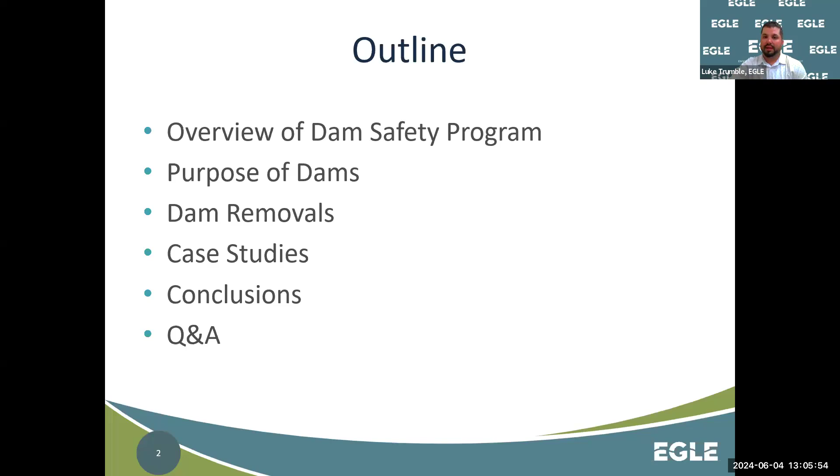For history, Michigan's Dam Safety Program was established in the late 1970s, I believe 1978 was the official date. It followed two major dam failures out west: the Buffalo Creek and the Teton Dam failures, which sparked a nationwide interest in dam safety. The federal government established a national dam safety program, and states started to follow suit. It was originally housed in DNR's engineering division, and we really didn't have much authority at that time. It was just to permit construction of new dams. We had very little regulatory oversight of existing dams or any safety standards.

That all changed at the end of 1989, when Public Act 300, the Dam Safety Act, was established, giving us authority over construction, alteration, and removal of dams, and setting forth safety requirements dams must meet to be in compliance. It also provided an avenue for compliance and enforcement if dams were found out of compliance. That was slightly modified in 1994 and wrapped into NREPA, the Natural Resources and Environmental Protection Act, so it's now known as Part 315 Dam Safety. In addition, we have Part 307, the inland lake levels statute, more commonly known as the legal lake level statute.

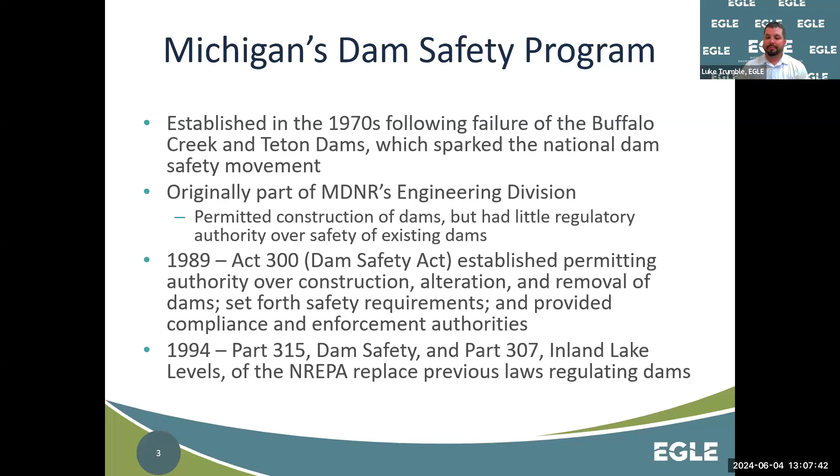So who we are in the Dam Safety Program: there are 7 of us including myself, and these are my 6 staff - I'll show you a coverage map. Allison Hartz, Thomas Horak, Mason Manuzak, Mike Size, Joy Stone, and Mitchell Thalen. Four of them cover regions of the state, and we have a grants administrator and centralized senior staff in Lansing.

This is the coverage map. Mike Size covers the UP and northern portion of the Lower Peninsula. Thomas Horak covers Southwest Michigan, including the Grand Rapids and Kalamazoo districts. Joy Stone covers the Lansing, Thumb, and Saginaw Bay area - the Bay City and Lansing District Offices. Allison Hartz covers the southeast portion of the state - the Jackson and Warren District Offices. Mitchell Thalen has statewide coverage, and also vital, though not shown on this map, is Mason Manuzak, whose primary function is grants administrator and coordinator for the Dam Risk Reduction Grant Program, which was implemented last year. So that's the staff.

What we needed to understand: what is a dam and what do we regulate? The Part 315 dam safety definition is basically an artificial barrier that is 6 feet high and impounds at least 5 acres of water. There are smaller dams that don't meet those size criteria that aren't regulated under dam safety, but are still dams - they pose less risk and create less of a barrier than those meeting the size criteria under Part 315.

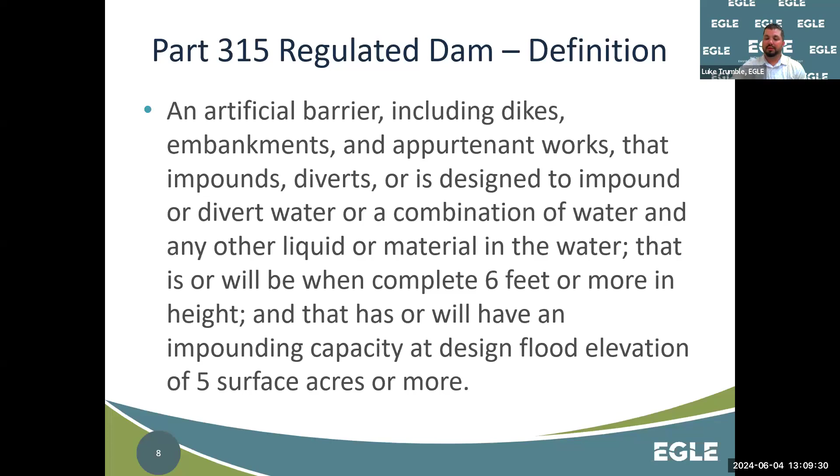And then as you go north, there's still a lot of dams. There's dams in every county, but the concentration spreads out as you get into the more rural areas.

Of those 2,600, approximately 825 are regulated under Part 315 - those are the ones that are 6 feet high and impound at least 5 acres. Another 235 or so are regulated under Part 307, the inland lake levels statute, legal lake level structures. And then an additional 92 federally regulated hydropower dams - those are not regulated under dam safety by the state, but are regulated by the Federal Energy Regulatory Commission as they produce hydropower.

Of those regulated dams, approximately 800 are privately owned and 350 are publicly owned. The remaining 1,400 plus or minus dams in the inventory are unregulated, meaning they do not meet the size criteria for Part 315 regulation, don't have a legal lake level associated with them, and are not regulated by FERC. So those are the smaller dams that don't meet the requirements of any of those statutes.

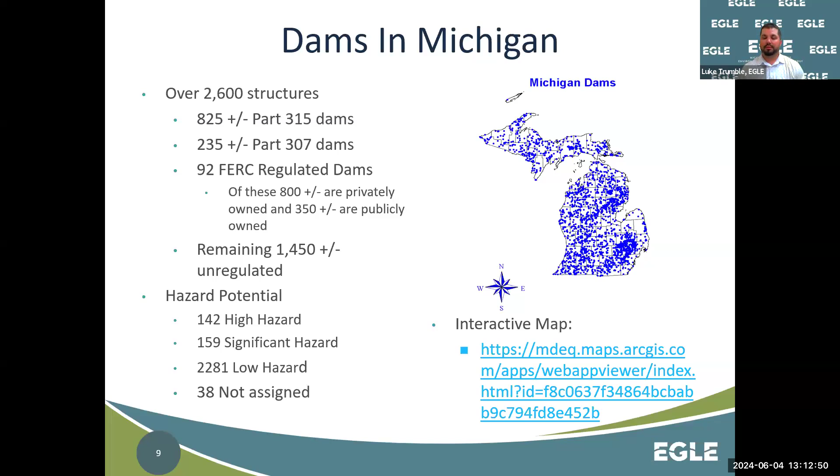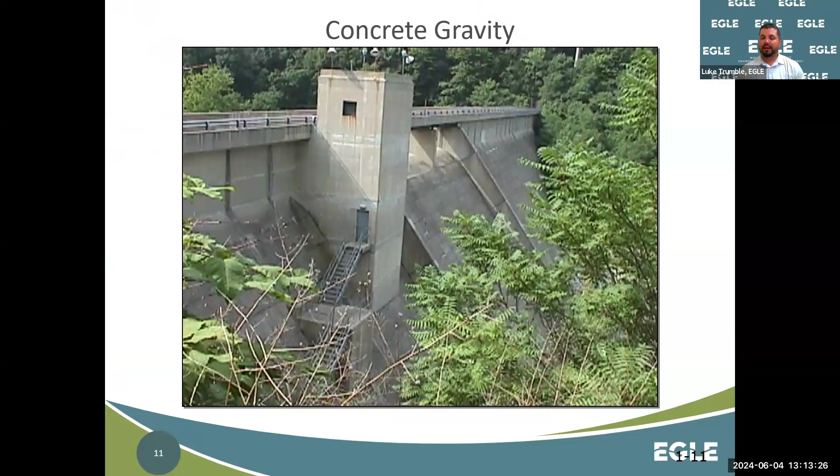Other than what comes to mind, this is a concrete gravity dam. It's basically where the concrete structure spans from bank to bank, and the mass of the concrete itself holds the dam in place and holds the water back. There is no earthen portion of the dam.

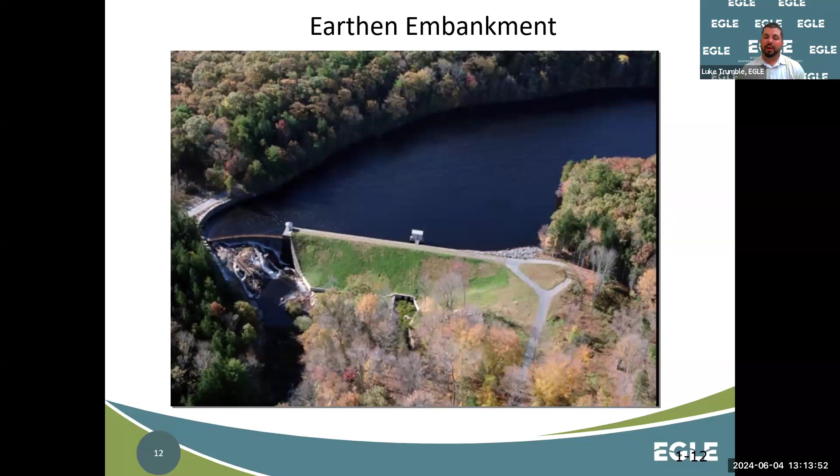More likely what you see in Michigan is something like this, where you have a large earthen embankment, and then you might have concrete or steel portions of the dam that convey water. This one has a primary outlet as the house-looking structure in the center of the photo, with the conduits through the dam with the outlets, and then an overflow spillway or emergency spillway at the end, shown on the left of the photo.

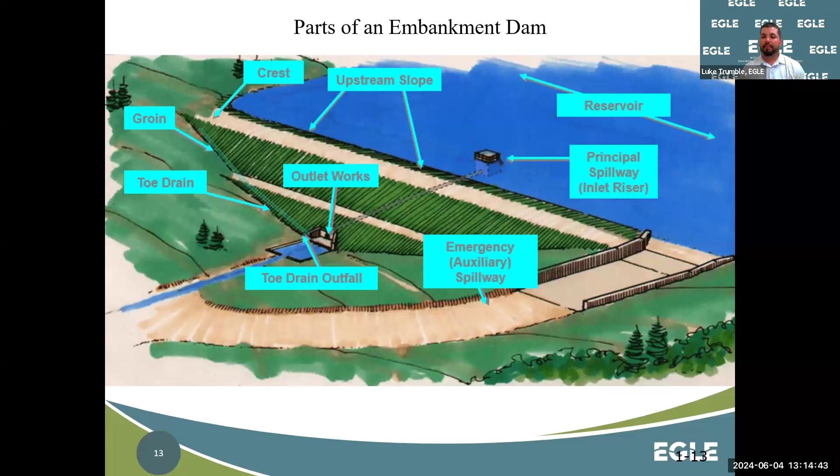A lot of times dams will have a clay core, an impervious core with seepage cutoff, which could be steel, sheet piling, could be clay, could be concrete, could be a bentonite slurry.

Oftentimes they'll have a downstream filter and drain system, which kind of collects the seepage that does make it through the impervious core and discharges that in a safe manner, rather than having it express out on the slopes of the dam and create slope stability issues.

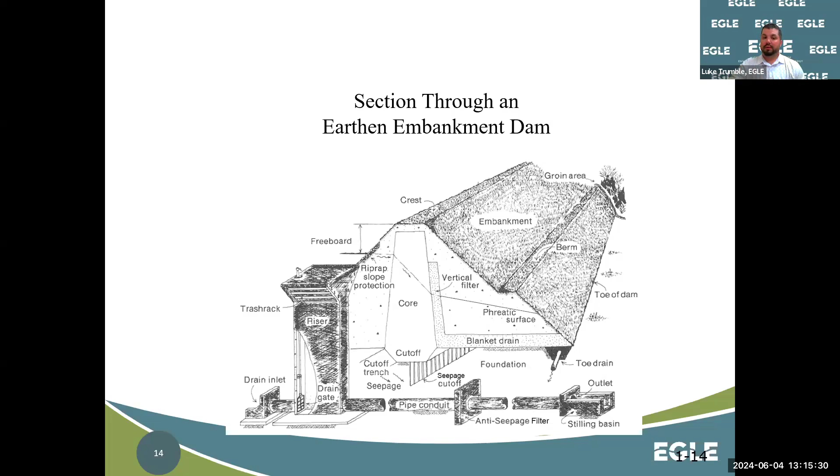So that's what a dam is. So what do we do? How do we regulate dams?

Like I mentioned earlier, we administer Part 307, which is the inland lake level statute. And that basically sets forth a process for folks to be able to establish a legal lake level on their lake that must be maintained.

In doing so, they typically set up a special assessment district so that taxes from that district can fund the long-term ongoing operation and maintenance costs, repair and replacement costs of the dam that maintains that lake level.

Under the statute, the counties typically take over authority over the dam, and they are required to have an engineer inspect their dams every 3 years.

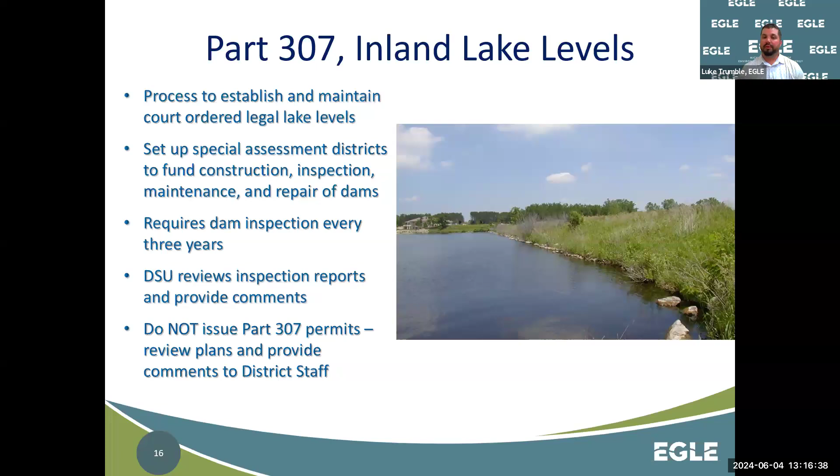We would review those inspection reports and provide comments on how the dam is being maintained, additional studies, repairs that are needed. We do not issue permits under 307, but rather we do a plan and specification review and provide authorization for construction. That typically happens alongside permit reviews under other statutes that EGLE does administer.

Part 315 is the other law that we administer. It's the dam safety statute. As I mentioned, it used to be known as the Dam Safety Act, PA 300, Public Act 300.

But the statute now, Part 315, mandates inspection of regulated dams, and that happens every 3, 4, or 5 years, currently based on the hazard potential that we talked about earlier. High hazard potential dams are inspected every 3 years, significant every 4, low hazard potential structures every 5.

It gives us the authority to enforce the statute and issue permits for dam related activities. It also allows us to inspect municipally owned dams free of charge if the municipality that owns the dam requests us to do so.

For those folks who have their own consultant do the inspection of dams, we review those and provide comment. High and significant hazard potential dams are required to complete and maintain an emergency action plan, which basically outlines the procedures and responses if a dam failure or something that threatens the dam were to occur. And then we can take enforcement actions when the dams are out of compliance.

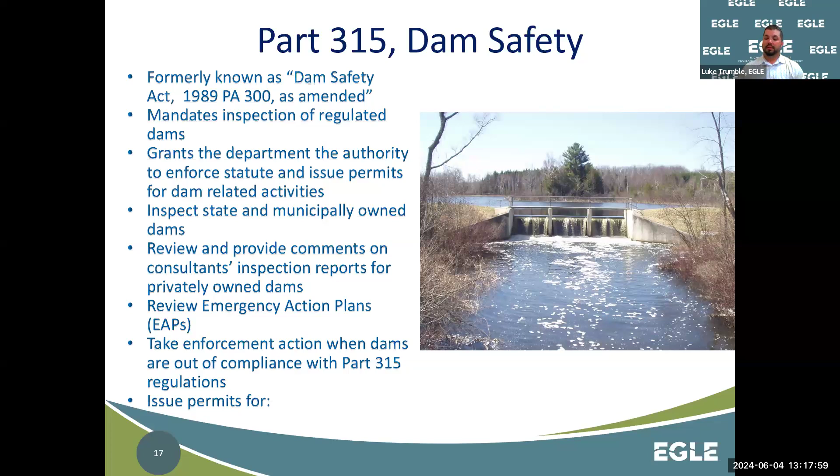So some of the things that we issue permits for - actually this is out of line, but this is kind of where we fit into the grand scheme of the Water Resources Division assumed 404 regulatory assumption.

So we have lakes and streams and wetlands, and then we have dams, and they're all kind of interconnected. Dams are kind of at the outlet of the lake.

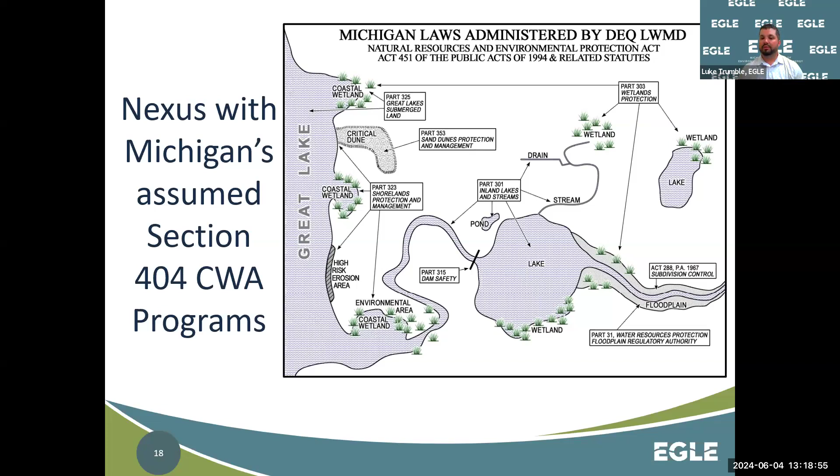So a lot of the permitting considerations that we have also dovetail right in with floodplains, wetlands, inland lakes and streams, and some of those areas that would include permitted activity under Water Resources Division. So it's very, very infrequent that we would issue a permit at a dam that also didn't require review under those other statutes affecting wetlands, streams, floodplains, and things like that.

So some of the things that we do issue permits for: construction of a new dam, alteration or repair of an existing dam, enlargement of a dam or an embankment or impoundment, and removals of dams. Abandonment of a dam is something that's very infrequent, but if it were to occur we would have to issue a permit for that, and then reconstruction of a failed dam.

And we're getting less and less permit applications for new dam construction. I've got a slide later on, we'll talk a little bit more about that, but it's very difficult to permit new construction of new dams when they're on a stream, just based on the environmental impacts and the potential flooding impacts and things like that.

So we've only had, I think in my tenure, I've permitted one new dam in 14 years on a stream, a few more that were off stream, like water resource or water supply reservoirs and things like that. But very, very few applications come in for new dam construction, and it's been that way for quite a while. I'll show a slide later.

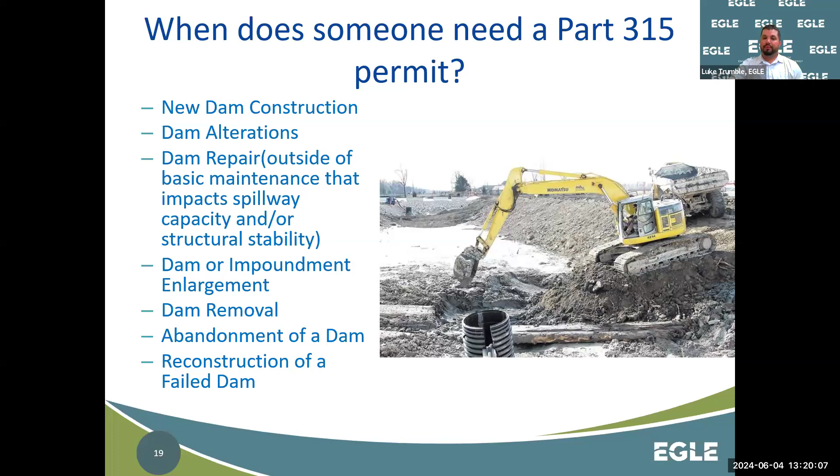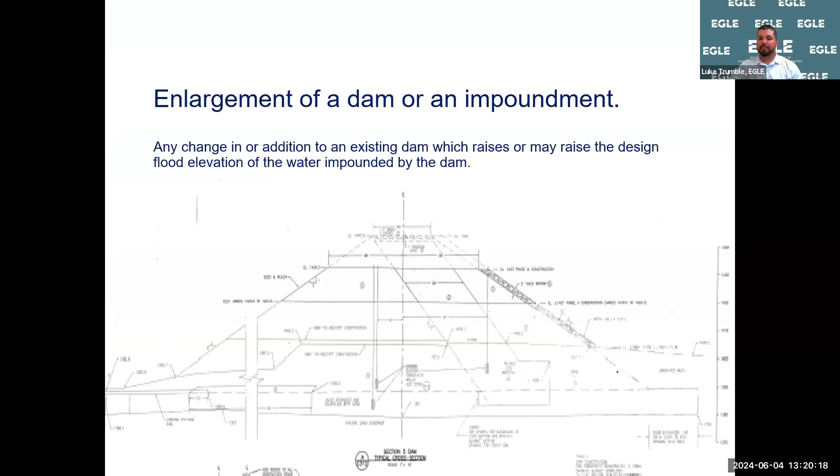So these are just some photos. Construction of a new dam obviously would require a permit under Part 315. Enlargement - it's hard to see from here, but these plans show a raising of the embankment and of the impoundment near the top in those dotted lines.

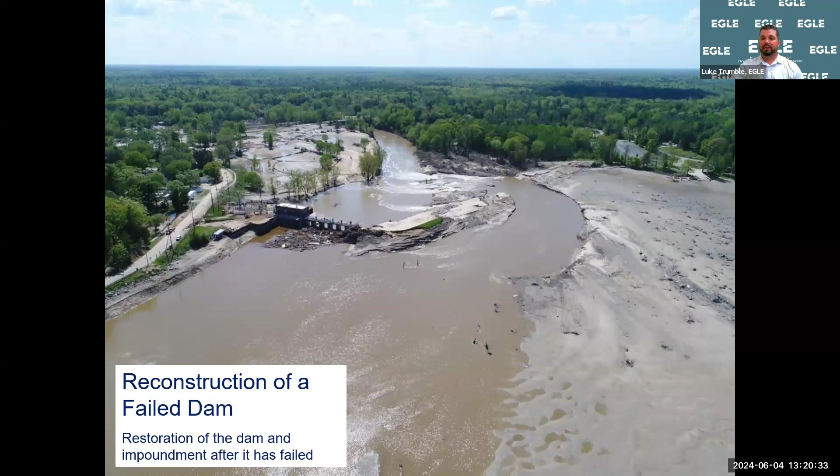Reconstruction of a failed dam. After a dam fails and folks wish to reconstruct it and restore the impoundment, that requires a permit under dam safety and several other statutes as well. And removal of a dam, when somebody wants to physically remove the dam and the impoundment and restore a stream channel, that also requires a permit to do so.

So taking a step back, we can look at why do we have dams in the first place? What are some of the historic and current uses of dams, and why did we historically construct dams?

Before hydroelectric power, a lot of dams provided mechanical power for grist mills, sawmills, things like that, to cut lumber, grind flour, float logs. That was one of the first purposes of dams in Michigan, to modify the stream to use the power of the water to perform some type of task that folks need. There are still a few mechanical power dams around, but those are less and less these days.

There's hydropower. A lot of dams were constructed as hydropower, or mechanical power dams were converted to hydroelectric power after they were built. There are 92 regulated hydropower dams, and a couple more hydropower dams in the state that are exempt from federal regulation and are regulated by the state. So around 100 total operating hydropower dams in the state that generate hydroelectricity.

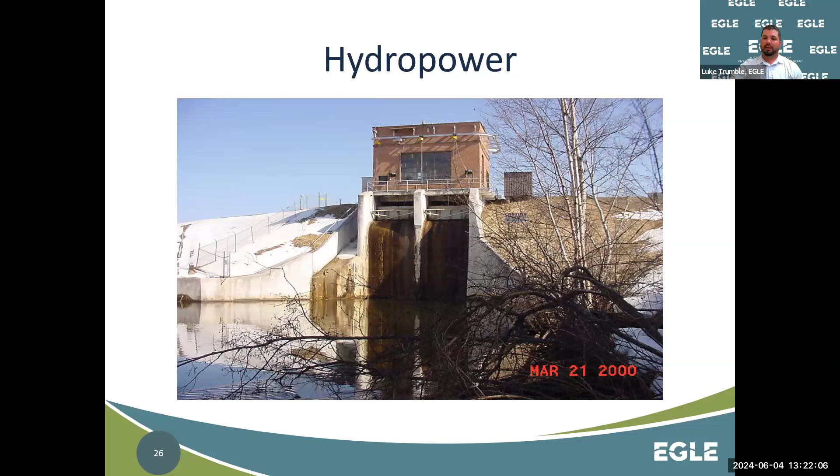Navigation, obviously, locks and dams, and augmenting of streams and lakes to allow for better navigation has been a historic and current use of dams.

Lake level control and recreation. I would say this is probably the most prevalent now, just augmenting a lake level or maintaining a lake level for the purpose of maintaining a recreational impoundment, where folks live and play and boat and fish in and around the water. So I think that's probably the primary purpose of dams in the state of Michigan now.

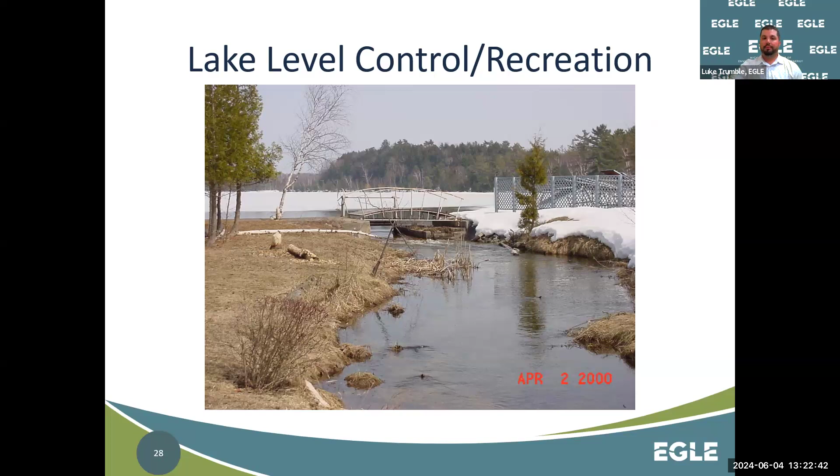Water supply, fire suppression. I don't think I included a slide.

Flood control. There's actually not very many dams in the state that are designed to provide flood control. We have 13 federally designed for the purpose of flood control.

Some other smaller dams and detention basin dams will provide flood control up to a certain flood. But most of the dams that you see that maintain a recreational lake, because the pond is full most of the time, provide very little flood control benefit during a large flood. There might be some benefit during smaller floods, but there's just no capacity to store and slowly meter out water over time if the pond is already full. So very few dams were designed for flood control in the state of Michigan, or are operating for flood control when you look at the whole.

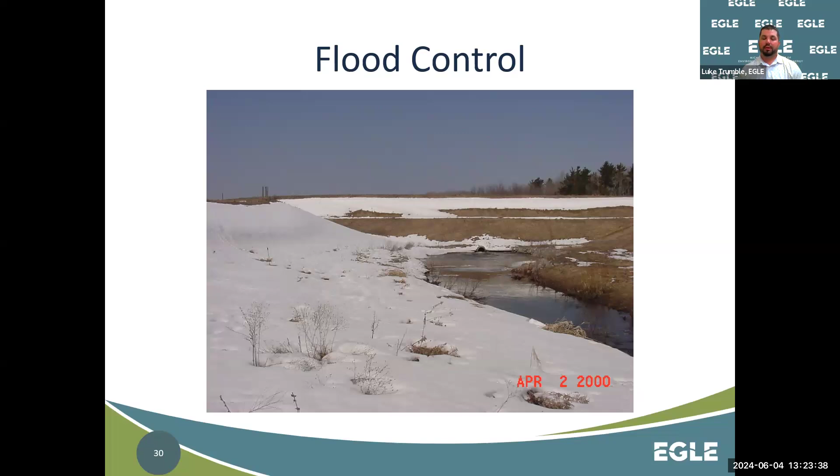And one that I didn't mention on here, but probably is pertinent to this group, is we also have several smaller dams that provide wildlife floodings, wetland mitigation sites, or just provide some type of wetland benefit from creating a shallower, less developed impoundment.

So we have all these dams. There's 2,600 in the inventory. There's probably hundreds more that we are finding every year, or that exist that are either too small to show up on a map, or remotely located. They're not in the public eye, so we don't know about them.

So why do we remove dams? The number one reason is safety. The dam is getting old, it's not been maintained, and dam maintenance is very expensive. So we're worried that there's a safety concern that the dam is going to fail if something isn't done. And often the most economically viable path forward is to remove the dam. We'll talk about benefits here in a couple of slides as well.

Along with the safety comes ownership responsibilities and liabilities. If the dam were to fail, a release of impounded water and sediment were to occur, there's a certain amount of responsibility and liability that lies with the dam owners that they might not want to maintain anymore. So as dams get older, the increased cost of maintenance and repair can be a deciding factor.

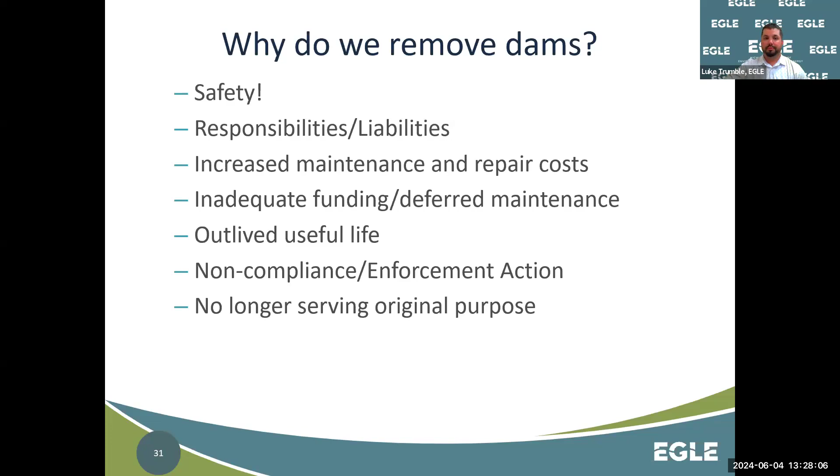This mirrors the national trend as well. Around that time, there were a lot of public works projects and industrial expansion, and dams were the flavor of the day. We built almost 500 dams in the state of Michigan in the 1960s. You can see it sharply drop off in the 80s and 90s, and though I don't have an updated figure, it continues to go down from there, to previous levels of less than 5, maybe 1 a year now in the early 2000s, 2010s, and 2020s.

So as you can see, from the peak in the 60s and maybe 70s, that puts the dams right in that zone of getting towards the end of, or surpassing, their useful design life. So for all the dams that are 50 years old or older, unless there's been routine maintenance that extends the life of the dam, we're probably talking about very significant investment to maintain that dam in a safe condition, which would be full rehabilitation or replacement of the structures.

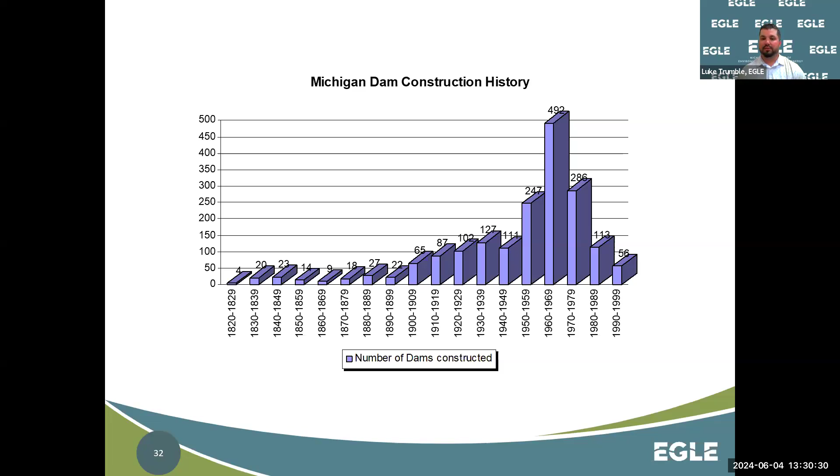So I think that's why, if you had a figure that said dam removal history in Michigan, I bet it would mirror this, where it was probably very low and then it's probably trending up. I don't know if we'll ever see 500 dam removals in a year, but we've seen a continued increase from the 90s, early 2000s, and now. I think we average between 5 and 6 dam removals per year, and I think we're going to continue to see that trend increase.

So here's some of the benefits, social and economic benefits of dam removal.

As we kind of talked about earlier, it eliminates the hazard associated with dam failure. So if you remove a dam, it no longer holds back water and sediment that could be released in the event of a failure that could cause downstream and upstream impacts that we'd be concerned about.

You eliminate your long-term operation and maintenance costs. Typically when a dam is removed and the stream channel is restored, it should be stable and should not require a lot of ongoing maintenance. So the cost to maintain should go way down.

It reduces upstream flooding in a lot of cases, where if you're holding the water level artificially high, as flood flows increase, areas outside of the impoundment could flood. If you take the dam out, that water level drops significantly, and typically those areas no longer flood during the same storm event. And then you restore the natural flood storage and attenuation that's provided in adjacent wetlands and floodplains that were underwater while the dam was in place.

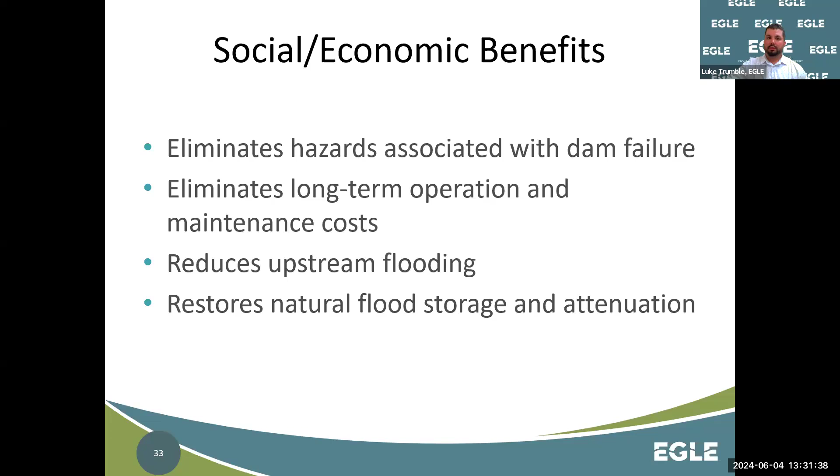Ecosystem benefits: you improve the movement of biota, aquatic and terrestrial, upstream and down. Improve riverine habitat for spawning, foraging, and other things. Restore the natural flow regime and sediment transport, which helps improve habitat quality.

Water quality: we eliminate the thermal pollution that happens as water warms in impoundments. We get increased dissolved oxygen and decreased biological oxygen demand. So we improve nutrient cycling and movement, and restore the natural channel morphology—the ability for the channel to adjust to different flow patterns and move sediment through the system, reaching a dynamic equilibrium where we don't have impounded sediment or erosion occurring as much in the stream system.

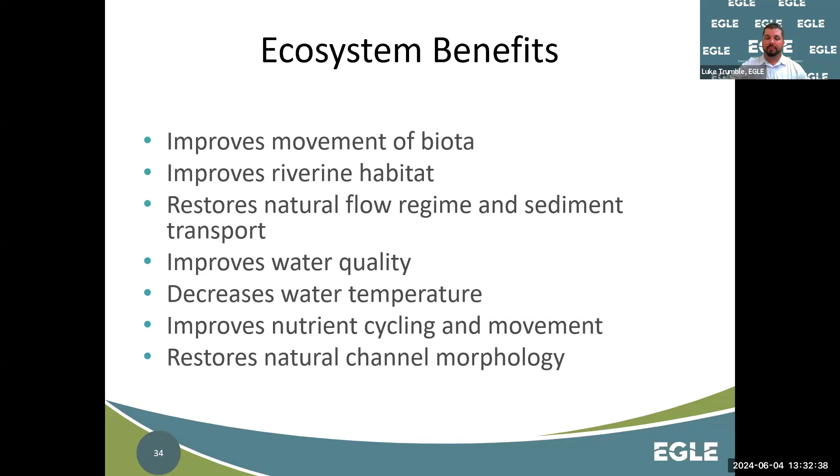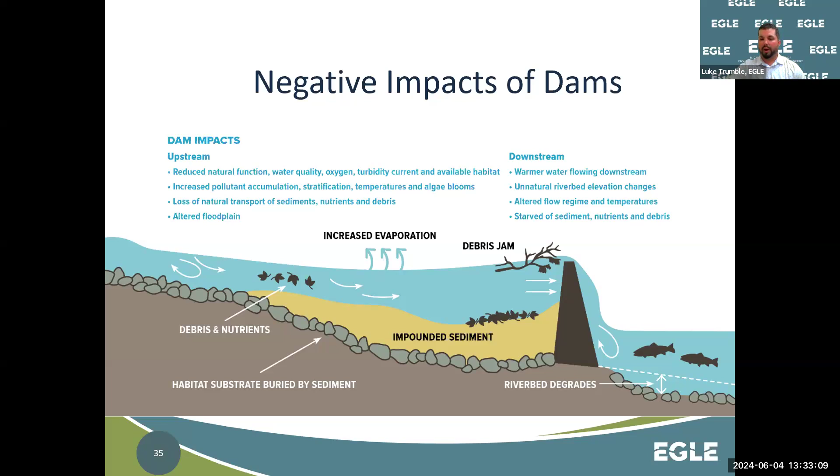Here are more benefits: increased spawning habitat, passage, cooler temperatures, natural flow regimes—things like that I already talked about.

So I'm going to switch gears a little bit and go to more of the permitting of dam removal projects. I just wanted to be upfront that dam removal projects are complicated. They have a lot of moving parts, a lot of statutes that we administer here in Water Resources Division, and some other statutes that are outside of our purview but still housed within EGLE. I drew this diagram.

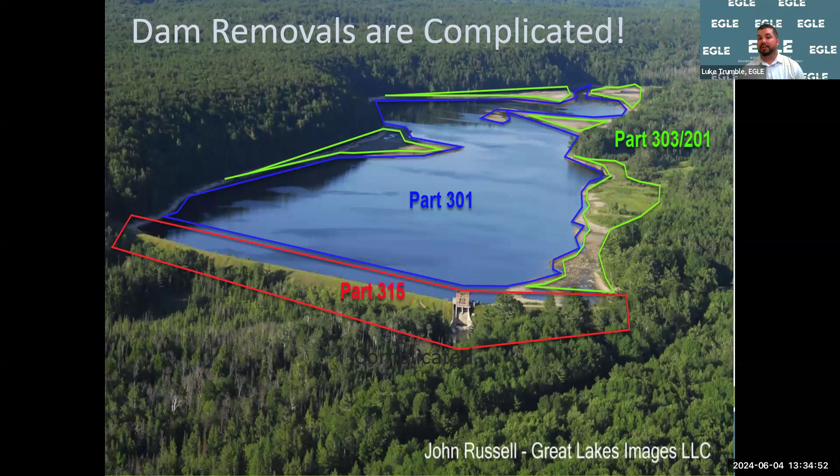Then the green areas are typically regulated wetlands under Part 303, but I also put Part 201, which is administered by Remediation and Redevelopment Division and has to do with soil cleanup criteria—direct human contact on soils. In this partially drawn-down scenario where the impoundment was lowered several feet, it exposed areas that used to be sediment underwater, now soils subject to direct human contact, so there are different cleanup criteria for those soils.

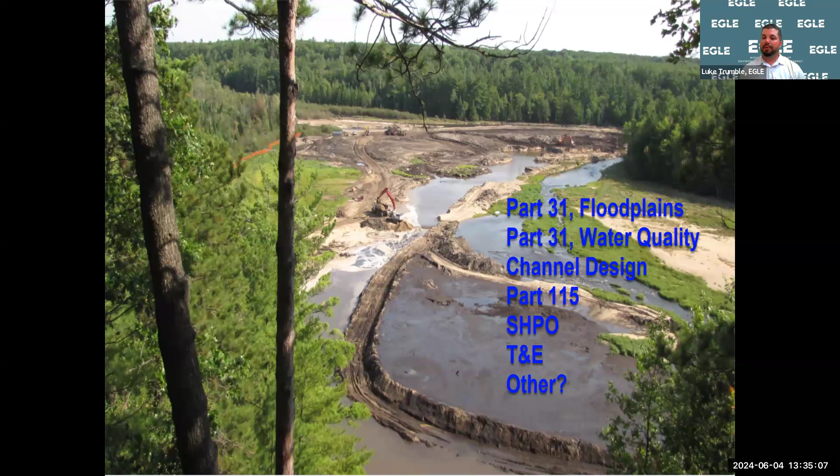This is another picture from the same project during the removal. We've got Part 31 floodplain—we'll have to review the hydraulics of the floodplain, conveyance of water, placement of fill, and excavation in the floodplain and floodway. There's also Part 31 water quality concerns.

Obviously there's a lot of sediment mobility and turbidity that occurs when you dewater a channel and start to move sediment again. There's channel design—we want to do an in-depth review of what that stream channel and floodplains and the stability and morphology of the stream will look like.

Part 115 relates to solid waste under our Materials Management Division, which administers Part 115 and Part 111, related to solid waste and hazardous waste, respectively.

Anytime you start dredging sediment, if it's not designated as inert, it becomes a regulated waste, and you have to handle it, dispose of it, or store it in accordance with that statute as well.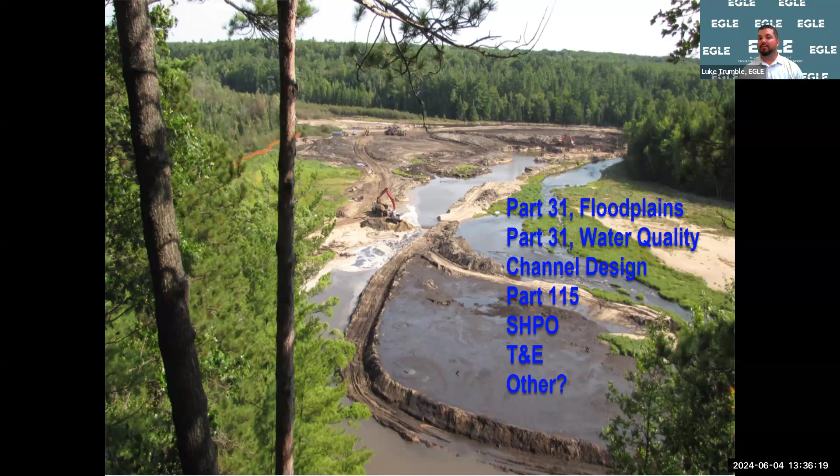SHPO, the State Historic Preservation Office, is also relevant. Oftentimes areas around dams or in former impoundment areas have some type of cultural significance, with potential areas where artifacts have been found. The dam structure itself might have some historical relevance, so there's definitely a SHPO component.

T&E, threatened and endangered animal or plant species, often occur in the wetlands and forested areas that surround the impoundment, or might reform in areas of the impoundment that are exposed. There are several other concerns that might arise on a case-by-case basis.

So that's just kind of an intro. These things can get very complicated. A lot of stakeholders, a lot of coordination that needs to occur, a lot of considerations that need to be made, and requirements that need to be met at multiple levels - state, local, and federal.

So what do we review on our end when we get a permit application for a dam removal? We talked a lot about Part 315 dam safety. The key components we look at there are the safety, dewatering, and physical removal of the dam. Once the dam barrier is eliminated and it's no longer maintaining head, the dam safety component is more or less satisfied - that's strictly the engineering behind safe removal and dewatering of the impoundment.

But in doing so, there's alteration of water levels, grading below the ordinary high water mark, and stream restoration and channel design that all need to be reviewed under Part 301 inland lakes and streams, to ensure impairment of the stream and habitat and all the animals that use the stream is acceptable, so that an impairment doesn't occur.

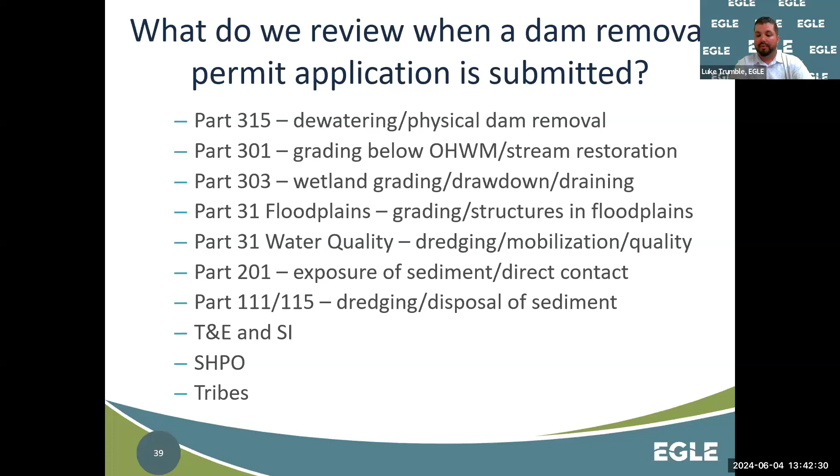On the threatened and endangered species and species of special interest: SHPO, as we mentioned earlier, covers cultural significance, cultural relevance, artifacts, or structures that have historic relevance as well. Tribes are often very interested in dam removal projects and want to ensure that those same areas of cultural significance are protected, and that the dam removal will provide benefit to those important areas.

So a little bit more information about what's required. We're getting into the name of the presentation: facilitating dam removal projects, facilitating permitting of dam removal projects. We're going to get a little bit into the weeds about what is required in a permit application for dam removal. It involves multiple statutes and multiple pieces of information and documentation that need to be provided, commensurate with the complexity of the project. Smaller dams where some of these things are not as huge of a concern, we can scale back a little bit. But the larger dams in some of the case studies with large impoundments and bigger streams often require a lot of information to be submitted with the permit application.

Strictly speaking about Part 315 dam safety, the joint permit application form needs to be filled out with the relevant dam and spillway section completed. That will have blanks that need to be filled in about the dam—the size of the dam, the quantity of cut and fill along the dam embankment, lowering of the water, how far the water would be lowered, and stuff like that.

We need a site plan, specification, and basis of design report typically to review. We need to understand how the dam will be removed and how water will pass through. That's more in the dewatering plan, but also care of water during construction—both stormwater and conveyance of flow in the stream. We need to see the basis of design, what calculations, modeling, and analyses were run to come up with the design to ensure that it's safe, that we don't have failures pre, during, or post construction that would result in an uncontrolled release of sediment or water.

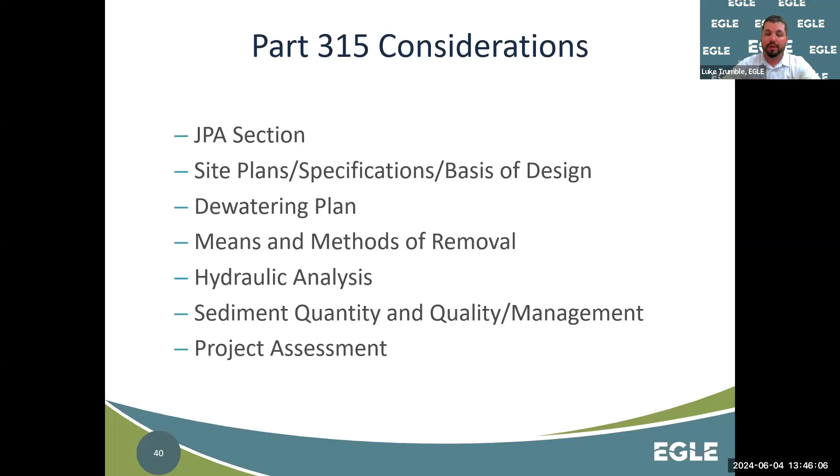Then there's a project assessment, defined in statute and in rule under Part 315 administrative rules. A project assessment document needs to have an analysis of a laundry list of things: wetlands, streams, fisheries, wildlife, threatened and endangered species, water quality, stream flows, sediment transport, turbidity, water chemistry, water temperature, and riparian rights. So in the project assessment document, we need to understand all the positive and negative impacts on each one of these categories related to the dam removal, and mitigative strategies when required.

Some of these will be a clear improvement, right? But some of these—a dam removal could have some impact on wetlands or things like that—might require mitigation if the project is carried out in a certain way. So we just need to have an assessment of the positive and negative impacts and mitigative strategies where required.

So jumping to Part 301 inland lakes and streams, same thing, the joint permit application has sections for inland lakes and streams, cut and fill below the ordinary high water mark, structures to be erected on bottomlands, channel design, things like that.

Site plan specification basis of design is going to be a constant theme for a lot of these, along with the feasible and prudent alternatives analysis.

This is a big one, right? When you're looking at the different ways to remove a dam and restore the channel, we specifically need to see that impacts to aquatic resources are avoided, minimized, and then mitigated, in that order. So looking at different sizes, configurations, locations for fills or spoils placement, and other things that would generate less impact while still achieving the project purpose. We're required by law to ensure that designers have considered that, choosing an alternative that avoids and minimizes impacts first, and then mitigates for any unavoidable impacts.

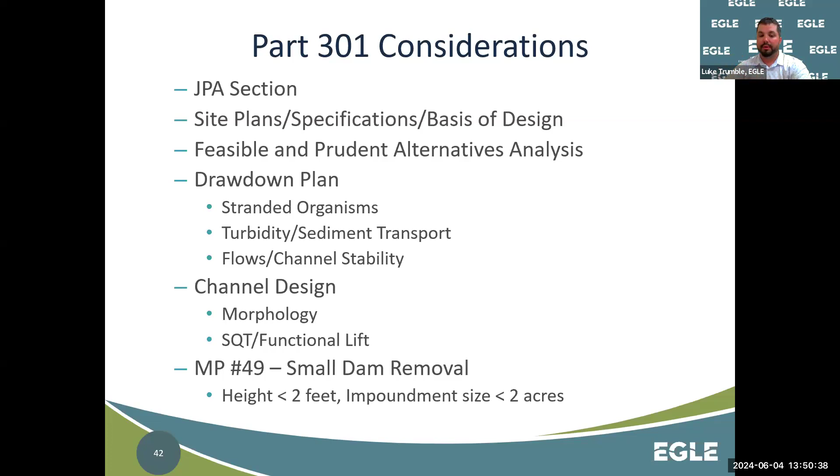And then just as a last note on Part 301, there is a minor project category, category number 49, for small dam removal. That's for dams that are 2 feet or less in height and impound less than 2 acres of water. For those, the requirements for permit application design are quite a bit less than something regulated under 315, or a larger dam with more head that impounds a lot more water and sediment. So there is an MP for this. If you have a dam you'd like to remove that's about 2 feet high and impounds a small area, talk with your district staff at EGLE about the possibility of permitting it as a minor project.

Part 303 is the wetland statute. Same thing here—I'll go through it quickly. Joint permit application sections, plans and specifications basis of design, feasible and prudent alternatives. This is more related to your grading and placement of fill. Have you avoided impacts to existing wetlands? Have you avoided impacts to areas that will reform as wetlands, to the extent possible? And have you reduced that footprint to the extent possible, then provided mitigation where needed?

So something we have a lot of conversation about with wetland professionals and consultants is what's needed for wetland delineation and analysis for dam removal. Typically we have to look at existing wetlands in the impounded condition, and then we need analysis of the post-drawdown and removal condition—what areas will remain as wetland, what areas will transition to upland, and what areas will reform as wetland that were previously underwater and not submergent wetland.

And then we have to try to avoid cut and fill in all the areas that would reform or persist as wetlands, or be prepared to mitigate for those fills. This is sometimes difficult because we can't account for all the areas where groundwater hydrology will remain at a higher elevation, like seeps on slopes that might maintain a wetland post-drawdown.

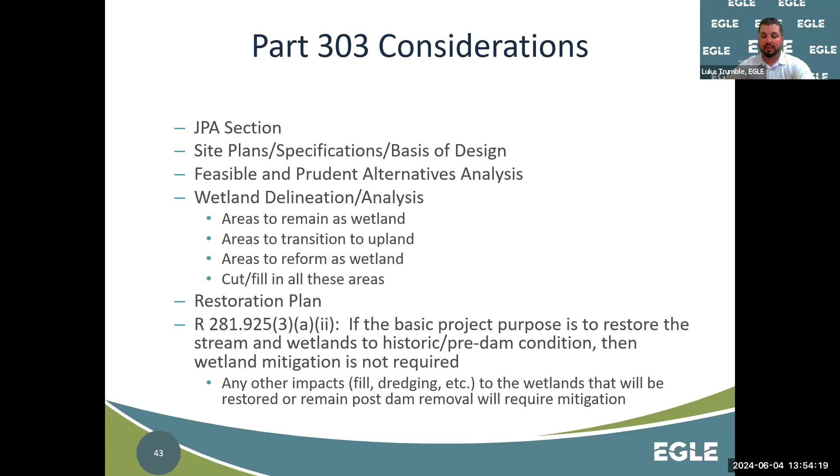Part 31, floodplain considerations. Obviously the joint permit application and plan specs, we need to understand the cut and fill in the floodway structures and the floodplain and floodway. I see there's a typo there, so we'll have to correct that.

Hydraulic model and report - if you look at the Part 31 hydraulic report guidelines, sometimes dam removals require a hydraulic model, sometimes they don't. It's typically dependent on what type - if you're going to put in-stream structures in, J-hooks, riffles, cross vanes, or any other type of in-stream grade control structure that might impact localized flooding, and if it's not clear cut that this removal will produce a reduction in flood elevations.

Through that hydraulic model report or otherwise, there has to be an analysis of harmful interference, which basically means any increase in flooding or velocities on structures that are insurable - people's properties, garages, houses, things like that - that would have increased flooding or flood velocities could be a harmful interference. So we need to understand that the project won't cause that in order for it to be permittable under Part 31.

I put in here as a note, a LOMR, a letter of map revision. Typically, if the community in which a dam exists is participating in the FEMA National Flood Insurance Program, it's the responsibility of the community to provide FEMA with the information and changes in hydraulic conditions, the modeling and maps for what the revised floodplain will be, so they can incorporate that into a letter of map revision and change those elevations, which regulate who's in and out of the floodplain and needs flood insurance.

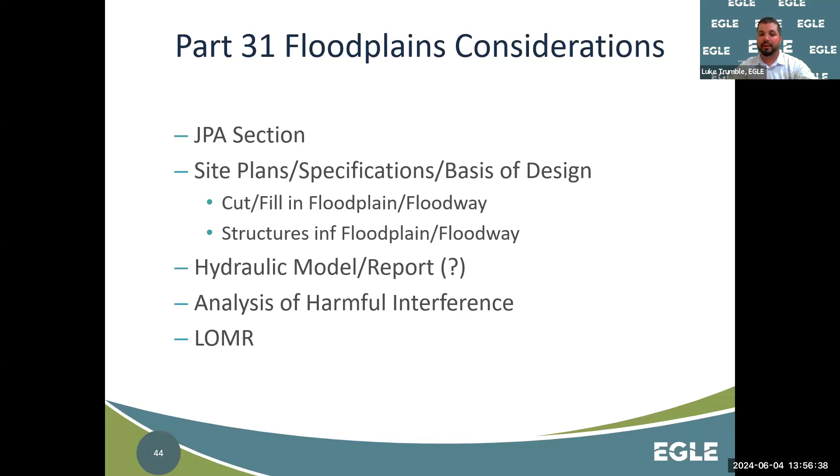It generally comes from the project, right? So the designers on the project will supply the information to the community to submit the application, so that they can make those changes and make sure that the folks that are in the floodplain post-project, or out of the floodplain post-project, are accounted for.

Water quality concerns, same stuff. What we really hone in on here is the volume of sediment available in the impoundment to mobilize. And then we'll have to do sampling and chemical analysis of those sediments, typically in accordance with WRD Procedure 48, which is a procedure for dredge sediments.

That's if it's a relatively small volume of sediment. If we have some of these larger impoundments that have hundreds of thousands of cubic yards of sediment that could be mobilized, typically we have to do more of a remedial investigation type approach, where it's a lot more sampling and analysis of the sediment quantity and quality outside of what was contemplated in Procedure 48, which was more for small dredge projects.

But we apply basically the same criteria on sample locations, size, depths, and numbers of testing analytes to characterize the chemical properties of the sediment in the impoundment that could be dredged, mobilized, or exposed by the project. Typically that involves cores to project depth, plus six inches, because we want to know what the material under the project depth would be that would be exposed to the water currently under sediment.

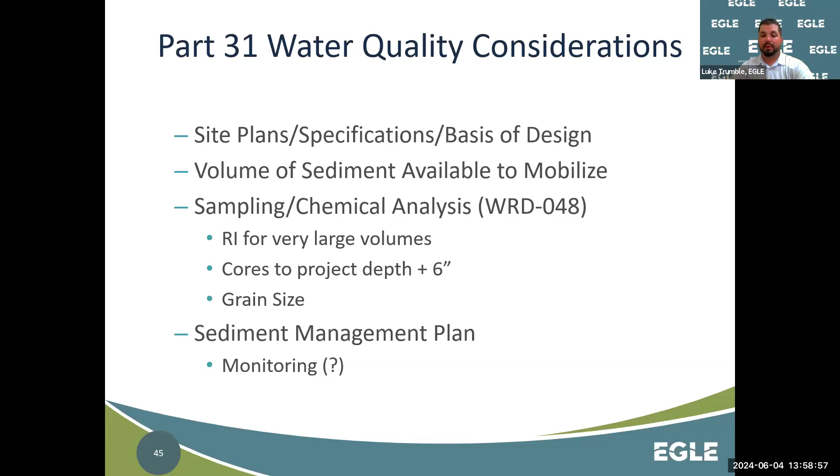Part 201, which is the soil cleanup criteria, a lot of the same things apply. What they would need to see here are maps of areas currently underwater that would be exposed for drawdown. And then the same criteria applies if dredged sediment is proposed for on-site disposal, locations of that, from where it's being dredged, and where it's being placed.

And then typically there's some sampling and chemical analysis. They typically utilize a different sampling approach where they're doing more of a gridded approach, only going down a certain depth to get the average contamination of that top layer of soil. And that's inconsistent with what we talked about earlier with the to-project-depth cores, so there might be some inconsistency there that might require follow-up sampling after drawdown.

But anyway, basically we're trying to determine whether or not the soils that will be exposed, that people will be subject to direct human contact with, post-drawdown and removal or placed on adjacent uplands, will create a facility under Part 201 and require something like due care, which depends on land use and the criteria for the amount of exposure people will have to that material.

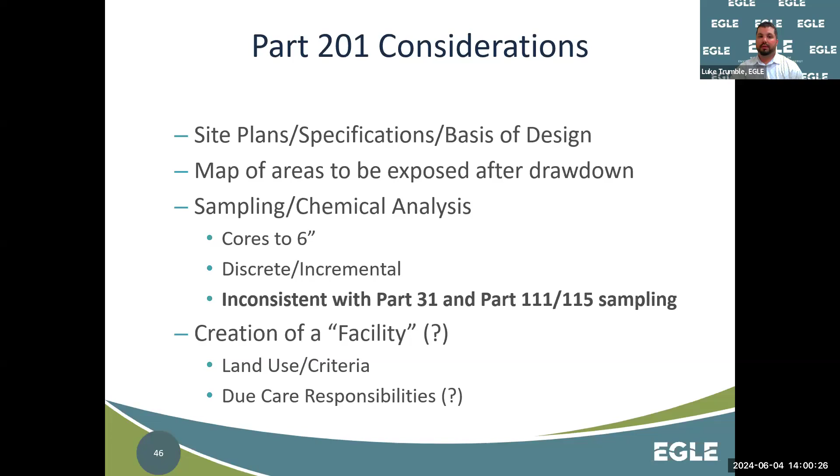Part 115, 111, is basically the dredge spoils. There's three characterizations from worst to best. Hazardous waste, if the contamination is so high it's only suitable for disposal in a hazardous waste landfill. Then solid waste, a regulated solid waste that exceeds some criteria but isn't bad enough for hazardous waste—it can be landfilled in a standard type 2 landfill, or potentially stored on site with restrictions. Or it can get an inertness designation, where the contamination level doesn't exceed certain criteria, and it can basically be used on site without restriction.

And these statutes basically just regulate the dredging, the handling, and the disposal.

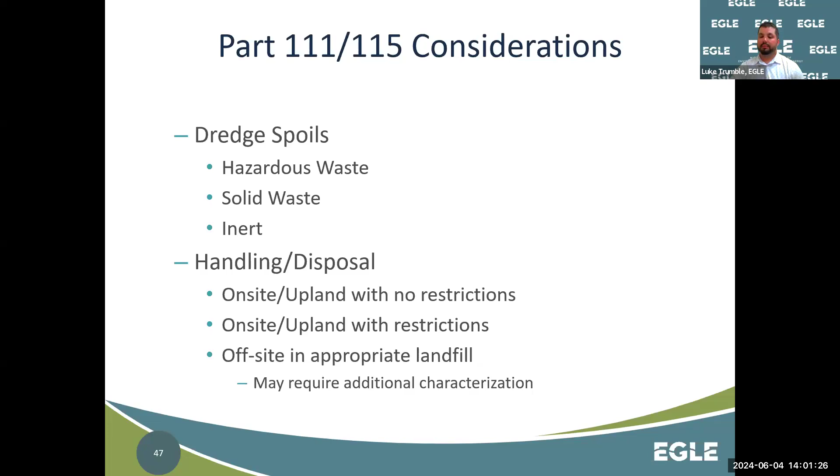Threatened and endangered species, species of special interest: what we'll do on our end is put a buffer area around the project. If we find occurrences of federally listed T&E species in the project area, we do a red file review, where we involve federal agencies and consult with U.S. Fish and Wildlife Service to understand potential impacts to federally listed T&E species. We also bring in our EGLE and DNR experts to weigh in on state-listed and state special interest species for the same type of review.

I'd say the most common occurrences in dam removals are federally or state listed mussels in the impoundment or below the dam. Bats range widely across the state, so typically with clearing of trees associated with the project, we'll have concerns about state and federally listed bats.

Eastern Massasauga rattlesnake typically utilize the areas adjacent to impoundments and dams, so there's a lot of considerations for timing of drawdown and impacts in areas where they might inhabit.

Less common occurrences, we've had birds and butterflies trigger a T&E hit that we have to have special considerations for, such as increases in flooding at certain times of year or lowering of water levels during critical periods in their life cycle.

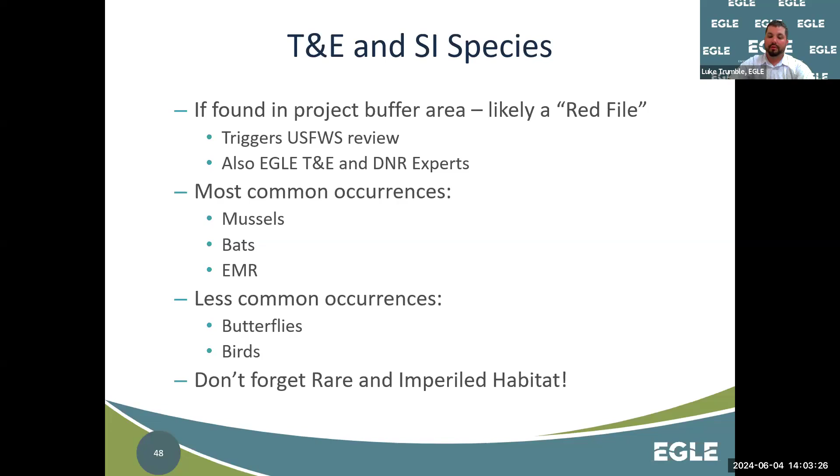Another consideration is SHPO - historic buildings and structures, archaeological sites, areas of cultural significance. If we find these areas within the buffer area of the project, we engage with the State Historic Preservation Office right away. The most common occurrences are dams or bridges that have some historical relevance or are on the historical registry.

In that case, typically if there are safety concerns, it will not prevent removal of the dam, but might require preservation of a portion of the structure or a monument to be put up to maintain that relevance.

If artifacts are found in the area, it might require special considerations during excavation, even having archaeologists on site to direct the digs and react accordingly if artifacts are found.

But generally this will not prevent removal of dams. There'll be special considerations and concerns during the removal and maybe some preservation efforts post removal. We're not in the habit of preserving failing dams that present public health and safety risks if the structure doesn't need to be retained.

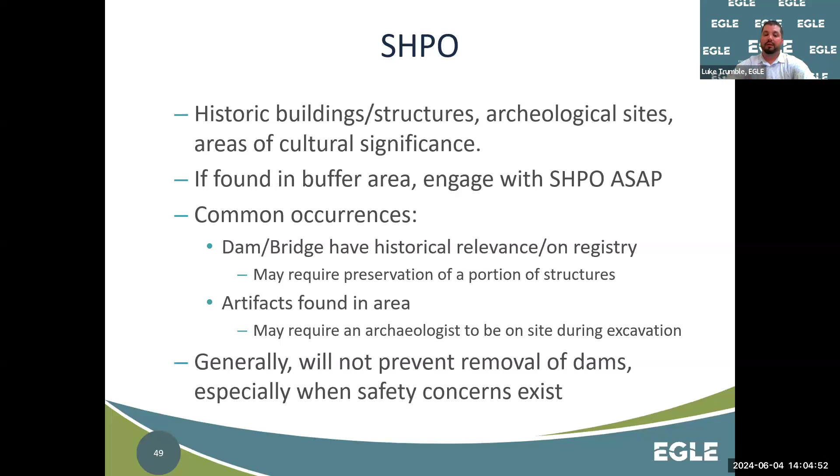Tribal involvement - tribes are often interested in dam removal projects. So if we think that tribes might be interested, we'll work with our EGLE WRD tribal liaison early on to engage with the tribes and start the consultation process.

Tribes are typically supportive of dam removals because it restores some of those areas that they used historically for fishing, hunting, foraging, and gathering in the past. But there might be some concerns about excavation in areas of cultural significance.

There might be wild rice beds in the floodplains of the impoundment or the stream that they'd want preserved. There might be other concerns - it's kind of case by case, but we definitely want to include tribes early, understand those concerns, and design the project in a way that either preserves or avoids impacts in those areas.

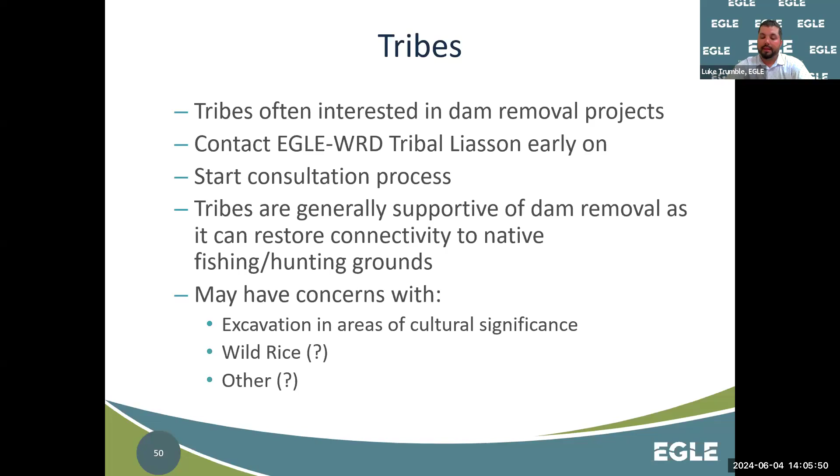All right, so I think that's mostly a high level overview of the major, recurring concerns that come up during dam removal permitting at the state and federal level. So I want to look at a couple of case studies of larger dam removals where wetlands and other issues became themes that took a lot of consideration.

The first one is the Niles Dam. Most people refer to it as the Pucker Street Dam because it went right adjacent to Pucker Street. It was constructed in 1928. The dam that was recently removed in 2020-2021 was built in 1928, is 38 feet high, and was constructed for hydroelectric generation.

There were issues with settling of the powerhouse and condition of the dam that prompted the city of Niles to abandon hydroelectric generation in the 1990s. The dam then posed a significant hazard potential. It was near parkland and some inhabited structures downstream - loss of life was not likely if the dam were to fail, but it was still a significant safety concern because the area was heavily fished.

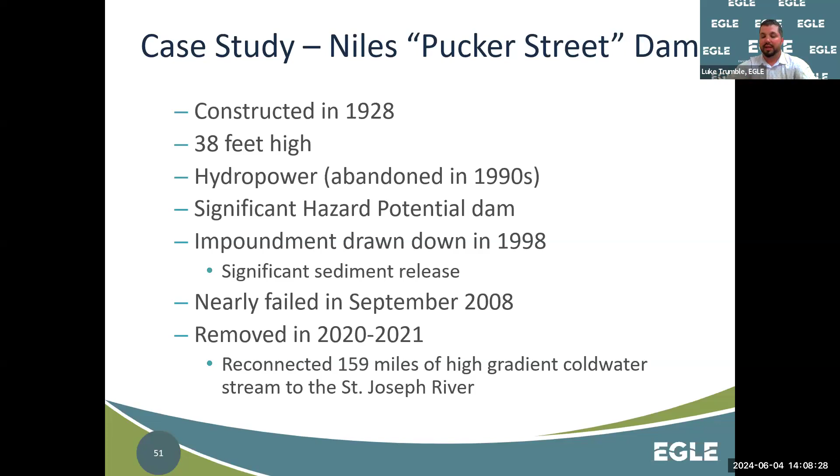Here's some historic aerials. Bottom right is the dam in the drawn down condition prior to removal. You can see the gates are up out of the water, so it's drawn down to the concrete spillway crest. Historically, the water was about 6 or 8 feet higher than that. The picture on the left is a historic aerial showing the impoundment at full pool, with sedimentation at the top where there's a lot of deltas and mid-channel bars forming, up near Creek Road and Dowagiac River.

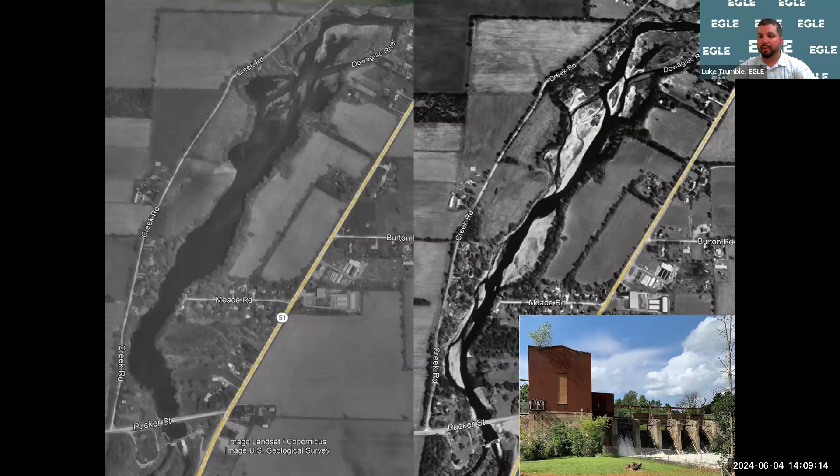On the right, that's the same location post 1998 drawdown. You can see a lot of the areas that were formerly underwater were exposed, and the river channels braided and came through those impounded sediments.

Here's a picture on the left of post-removal. You can see a lot of those exposed areas are now becoming vegetated as floodplain and banks. The dam is fully removed. The picture on the right is a zoomed in photo of the grade control structure placed at the dam, a rock riffle where the dam used to be. This is during construction, at the final stages. So you can see the progression here.

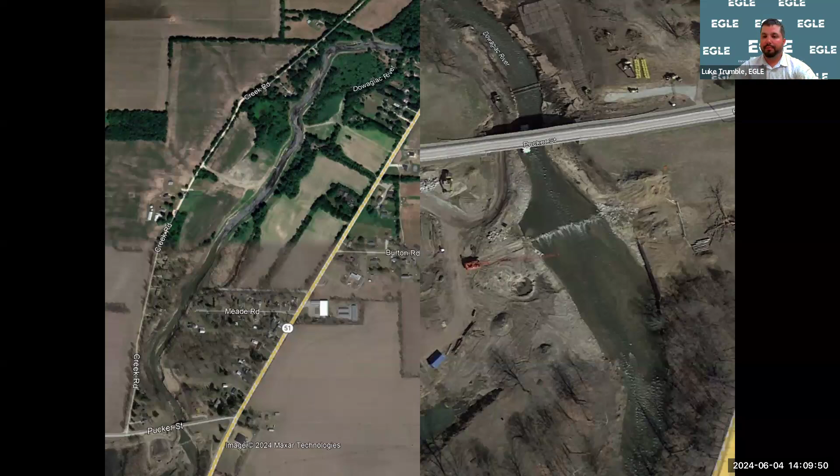There were some issues, right? There was a lot of sedimentation in this impoundment. It had been in place for nearly 100 years, and a lot of sand and sediment had built up that needed to be excavated or mobilized to restore the stream channel and floodplains. But this was a fairly steep gradient stream and fairly narrow valley, so there were very limited areas to dispose of those sediments in areas that weren't going to be wetlands. On top of that, there was a lot of groundwater input throughout the impoundment where we expected wetlands to persist after the water level was fully lowered and the dam drawn down.

I think that makes a difficult equation for avoiding those impacts, right? You either have to haul all the sediment off-site to dispose of it somewhere, which can be very costly, or find a place adjacent to place it. That's ultimately what the solution was.

The city purchased some adjacent land next to where the dam used to be, and they were able to have a very short haul distance from the project site and remove the bulk of the sediments generated for the stream restoration, placing it in those upland areas adjacent to the dam. So they avoided and minimized a lot of placement in areas that would have been wetland post removal.

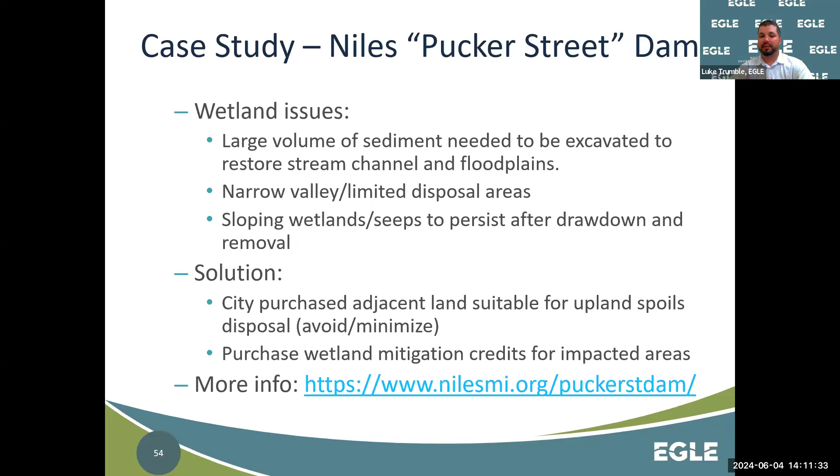For the balance where impacts were unavoidable, they did purchase some wetland mitigation credits so that they could mitigate for those areas that were impacted. I'll provide a link here if you want to look more at that project.

We'll go to the next one. The Boardman River dams: 3 dam removals and 1 dam reconstruction on the Boardman River up near Traverse City. A lot of this is borrowed from their website, so I'll provide a link at the end as well. It's the largest dam removal and stream restoration project in Michigan. It was a 295 square mile watershed that was completely cut off, but it's basically been restored all the way to its headwaters in the Kalkaska area.

They removed 3 former hydropower dams, and currently a project is about ready to kick off to reconstruct the Union Street Dam, which is the lowest downstream barrier in Traverse City downtown. It restored 3.4 miles of the Boardman River stream and floodplain through the impoundments, but reconnected over 161 miles of stream and tributaries. 250 acres of wetlands were restored or recreated, and about 60 acres of upland in the former impoundment areas.

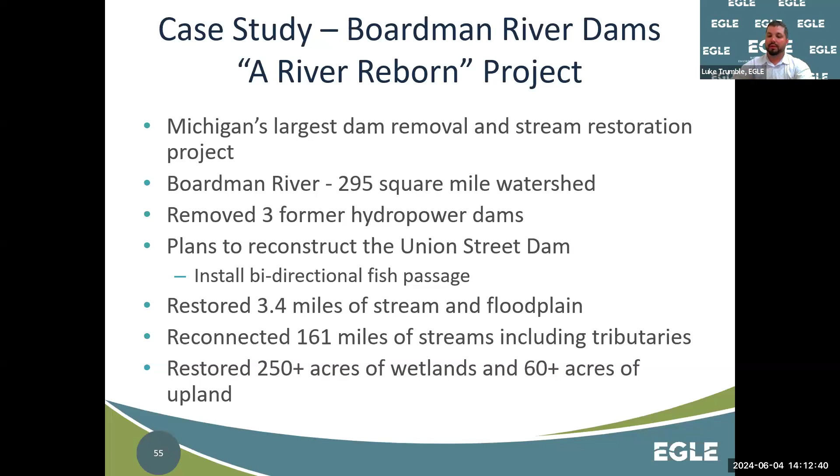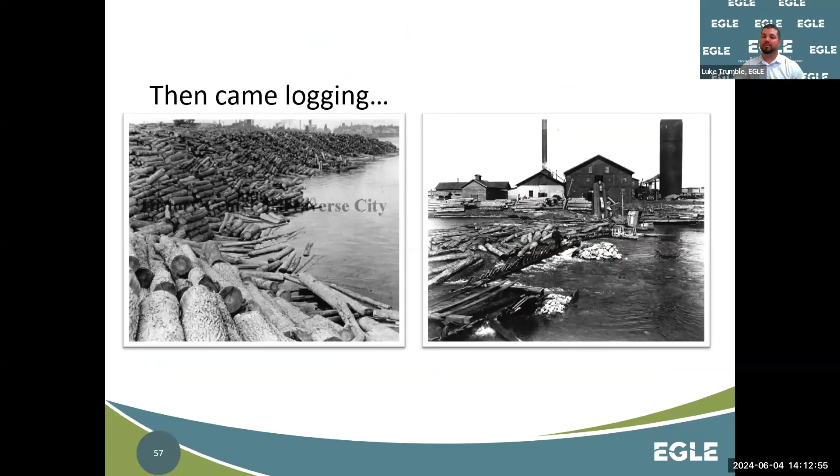Then, in the early 2000s, Traverse City Light and Power surrendered their license to generate hydropower and started to look at long-term disposition of those dams. They were leased from the city and the county, so the city and county were saying, hey, we have these hydropower dams that don't generate hydropower - what are we going to do?

Ultimately, around 2005-2006, the decision was made to remove 3 of the dams and modify the Union Street Dam. They started to lower the water level. So 2007 to 2011, the 3 upstream impoundments were lowered, and in 2012 to 2018, the upper 3 dams were removed.

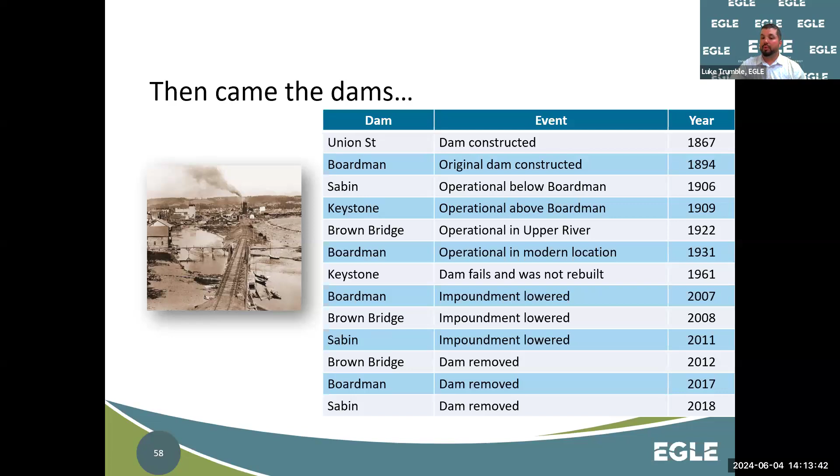So these are the dams. The furthest upstream was Brown Bridge. In the middle was Boardman. Next was Sabin, and then Union Street is right down in Traverse City.

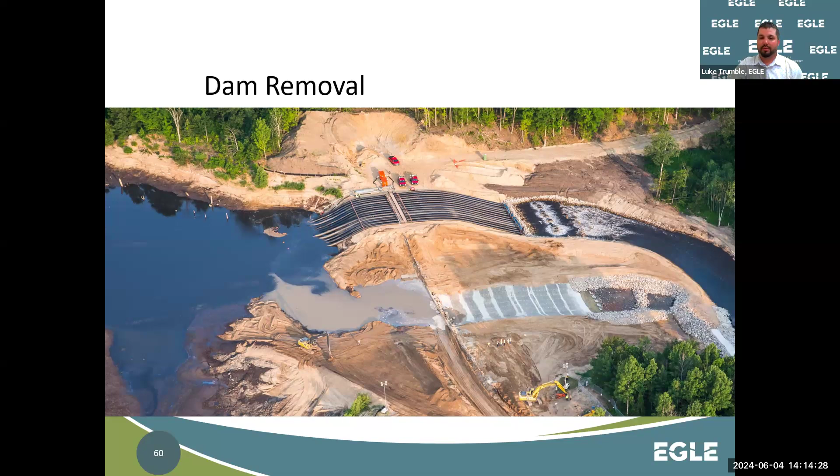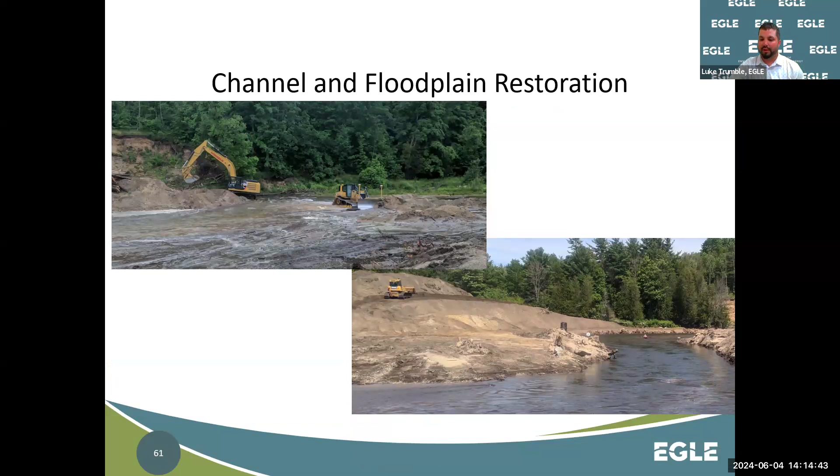I'm going to speed up a little bit because I think we want to leave some time for questions and answers. But there are pictures of active channel restoration, dredging and grading of the channel to place the spoils. The theme here is they piled them high and off to the side to minimize the footprint of spoil placement in areas that could be reforming as wetland.

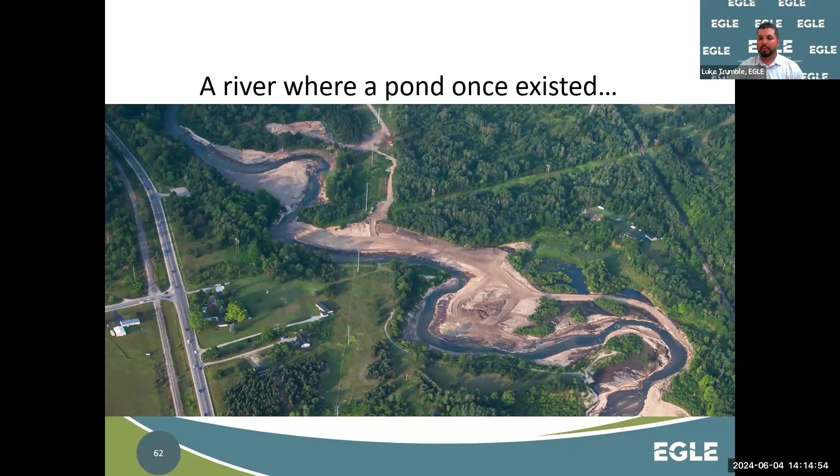Here's what it looks like post-drawdown and removal, with a lot of bare areas - this is pre-final grading. But this is what the final product looks like, where graded floodplains and native plantings are shown, the spoil areas are off to the side against the valley walls, and a lot of areas are graded to specifically return as wetland.

So some of the issues: a very, very large volume of sediment needed to be excavated to restore the stream channel and floodplains. There were seeps and tributary streams that came in that needed to be avoided. And there was a desire to keep some of the construction access roads as permanent paths for walking and things like that.

So the solution was to strategically pile the spoils high to the side - that was a term we used - in areas expected to transition to upland, to avoid and minimize impacts to areas that would persist or reform as wetlands. They also relocated some access roads to areas that would be or were uplands so they could keep them permanent without additional wetland impacts.

The temporary access roads closer to the stream were removed and graded out so they would be allowed to reform as wetland. And in the floodplains, they did a little micro-topography to encourage the formation of different wetland features to the extent possible in the newly graded floodplains.

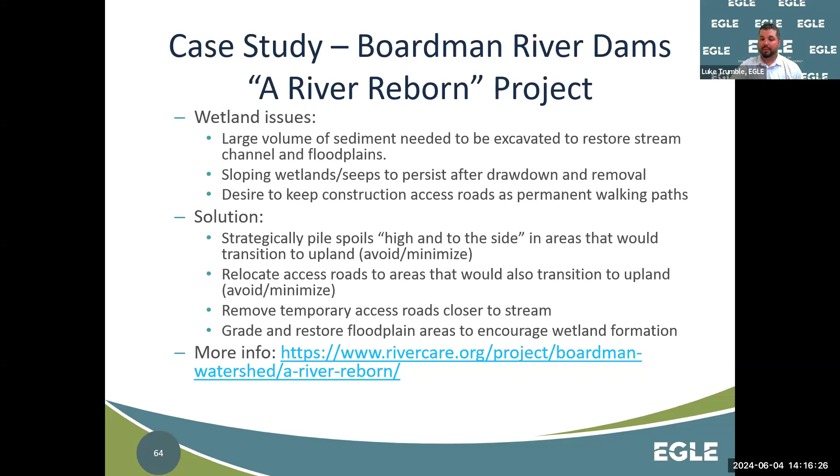Okay, so that was a lot, but wrapping up - dam removals are some of the most complicated resource projects to permit because of all the things we talked about today: a lot of moving parts, a lot of considerations, a lot of stakeholders. But they're also some of the most rewarding projects we permit, both from a socioeconomic benefit standpoint, eliminating hazards that might impact human health and safety, natural resources, and things like that, and providing a huge ecosystem benefit - that functional lift we talked about with the restoration of all the natural phenomena that occur in streams that were cut off for the years the dam was in place.

So some unsolicited advice: pre-application meetings are super useful. They can cut down the time and effort in the design and permitting process. If we go over concepts and talk about some strategies that might help in these projects, that can eliminate the need for design revisions and back-and-forth that cost time, money, and effort in trying to get an acceptable design that can be permitted.

We developed a document that we're going to be circulating very shortly, which is kind of a checklist or decision tree type document where you can go through, look at your project, and see if these criteria would apply, and then engage with the right folks at the right time to make sure that all the documentation and data collection occurs during the design process. This will result in EGLE and other stakeholders having all the information they need to review and hopefully issue a permit for a dam removal, with fewer delays, pauses, and additional costs being incurred if any of that information is inadequate or missing from the initial application.

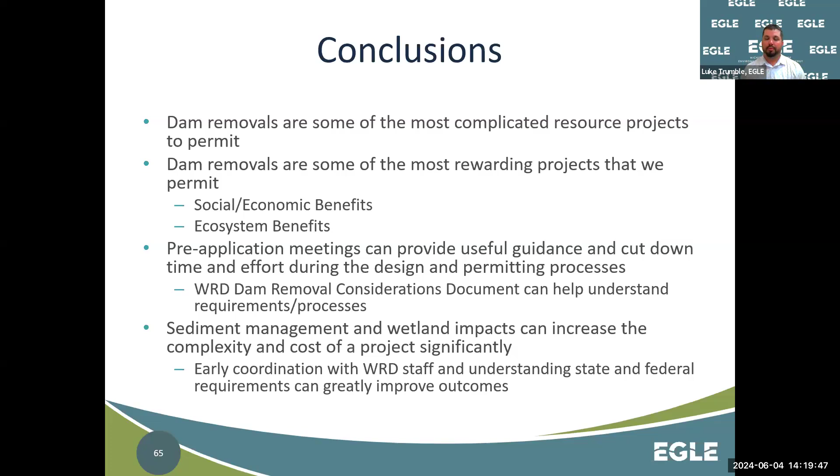So with that, I think I'm done. We have about 10 to 11 minutes for questions and answers.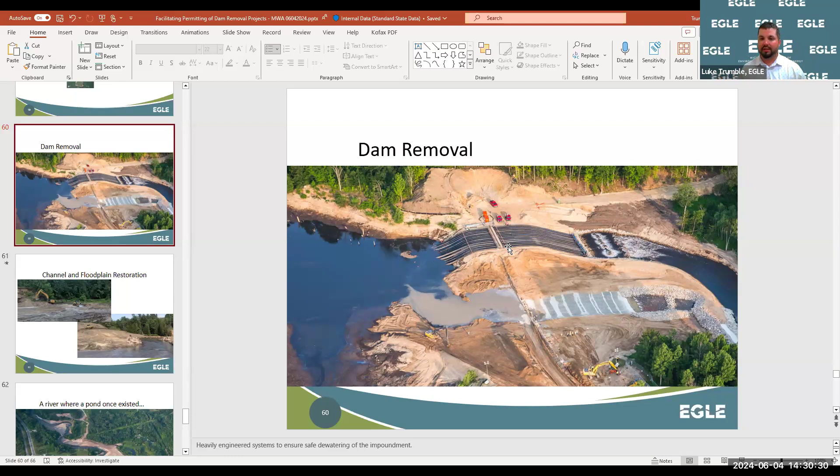This took a long time because it was, I think, 20 feet or more, so it was probably a couple months just for this portion. The project then took several months after that to do the complete restoration of the channel — the grading, the seeding, all that stuff. So hopefully that answers the question.

Nice, thanks Luke. There's a couple here I'll answer. Someone said thanks Luke, nice job — some of the hurdles and complexities for removing dams that you stated seem a bit overwhelming. Other than getting involved early in planning, is EGLE working to do things legislatively or internally to make it easier to go through this process?

I think, as Luke pointed out, one of the reasons these are complicated is there are a lot of different statutes and coordination that need to happen. Our perspective is those issues need to be looked at, so those reviews shouldn't be eliminated, but we are working on making that coordination process go as well as possible. We're also putting resources into this program to try to put the right amount of staffing into it. We have Mason, who's now our grants and loans coordinator, but he's also kind of our lead on dam removals. We're trying to get additional funding for dam removals, spending a lot more time on education and outreach, and we're also looking at our internal processes and how we can make those better — either procedurally, eliminating steps, or speeding things along.